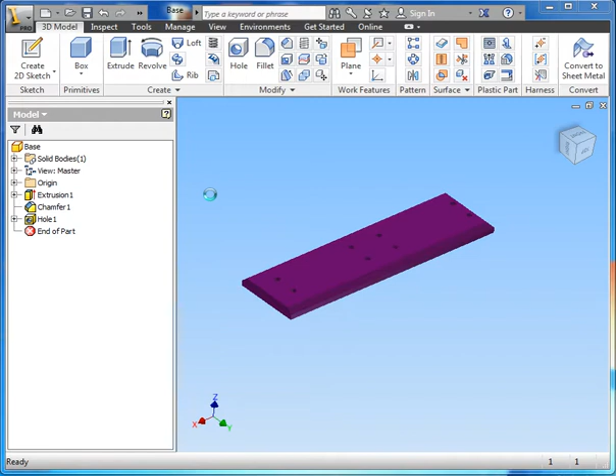What we're going to do now is make the anvil holder and the piston holder. Let's go ahead and make a new part. Standard inch IPT. Create. So now we're in the new part field.

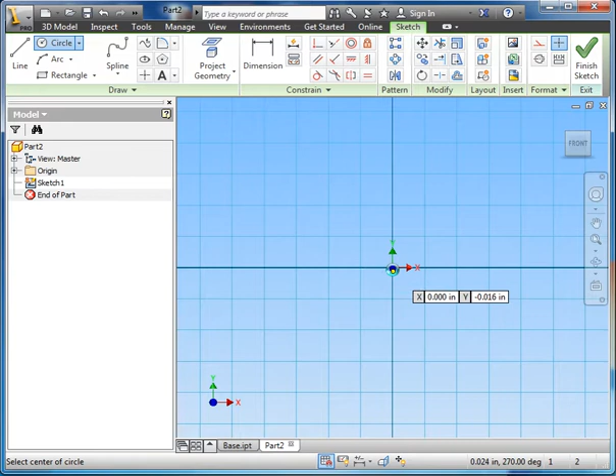I'm going to make a sketch, and we'll sketch on the plane here. Now, these two holders are going to be holding round objects, so I'm just going to center everything on the plane, because that way later on we could use the planes for constraining. Let's start here, green dot, I'm going to make a 1-inch circle.

So dynamic input, I type 1, enter, there's my 1-inch circle. Now I'm going to make a 2-inch circle, this is going to be the outside. So I go 2, enter, like so.

So I've got my circle there. I'll use my rectangle tool, click on that intersection and that intersection. Oops, try that again. There we go. So I've got it lining up there, lining up there. I could have used a 3-point for this, but didn't.

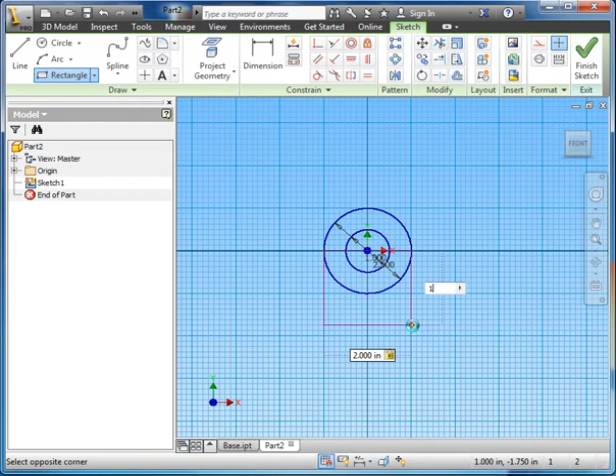And we'll make this 1.5 - sorry, that should be 2, tab 1.5. So we've got a basic little cube there. From here, we're going to use the trim tool. Trim that out. Hit escape to leave the command, and we'll click on this and delete that line.

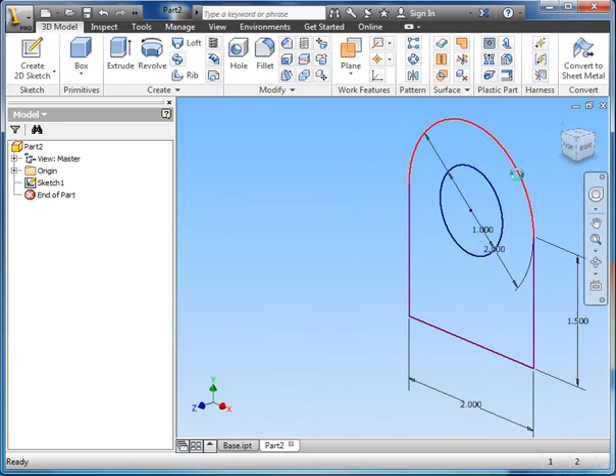So we're left with just this profile. Finish sketch, and now let's extrude it. So I click extrude, 1 inch is selected by default, that's fine. Now I could make it bigger or smaller, let's just leave that at 1. And there we go, there's the basic part for the anvil holder, the one at the end.

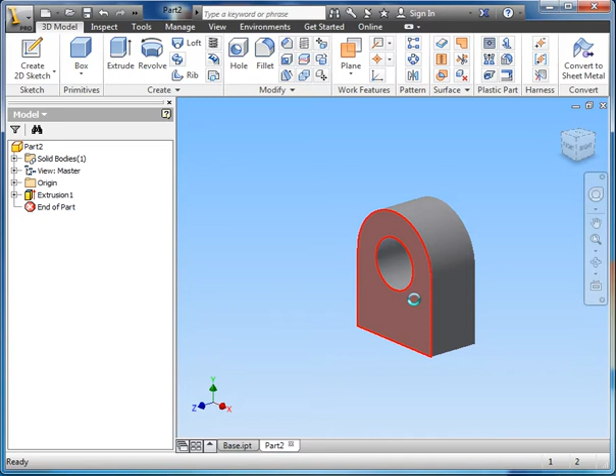Now, the anvil holder has 2 holes that match the 2 holes we drew on the base. So let's turn this around to the bottom, create a new sketch on there. There we go, and we want to use the point tool again. So I'm looking for my center point - you can see the green dot there is marking center. I'm going to move over, click, and click. Now let's add some dimensions to that.

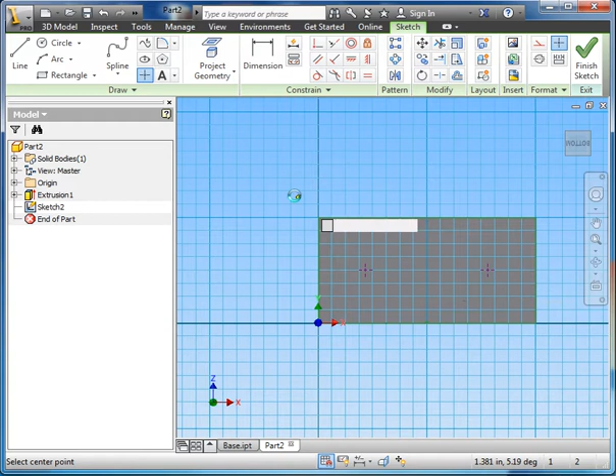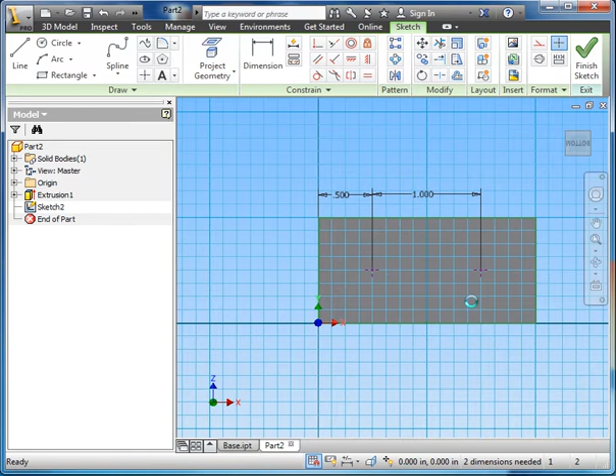Well, we know these are going to be 1 inch apart, and this has to be centered, so we'll go 0.5, and there's our centered holes. We know that it's centered this way because we used that point, but just to check we can click on there and see, okay, it's 0.5. Escape and finish sketch. So there's my 2 holes.

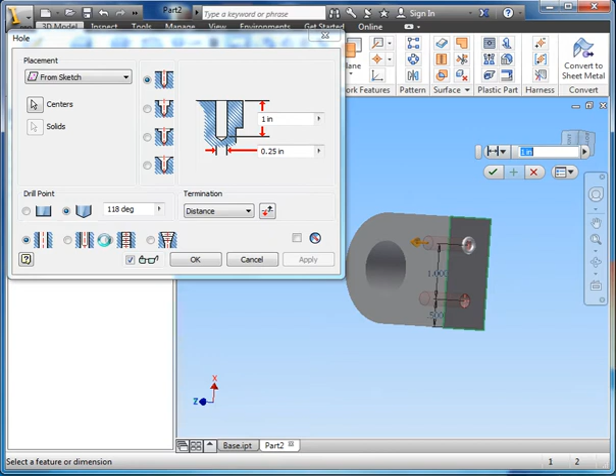Now I can take those 2 holes, I'm going to use my hole command again. You can see that it's selected them because it's the only holes available. And I'll turn my termination to distance, and we've got 1 inch depth there. And we're going to add a threaded hole, so over here we've got the thread, click on that, and it's going to come up to a whole other section here. You want to make sure you're using 1/4 inch, 1/4 20 UNC.

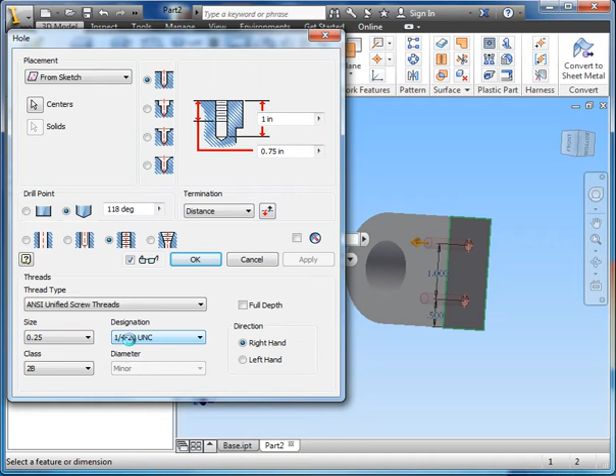What that means is the outside diameter of the thread is a 1/4 inch. I'm not quite sure what the inside diameter is, but the outside diameter, the high points on the thread, is 1/4 inch, and that there's going to be 20 threads per inch. This is a standard imperial thread. You could also have a 1/4 28 UNF, and those would be our 2 1/4 inches. But we're going to use a 1/4 20. I click OK, and you can see we've got the 2 holes threaded.

So from here, let's change the color again, because I like to do that. Orange, red, there we go. So we've got a nice red part. And let's save this - so this is the anvil holder.

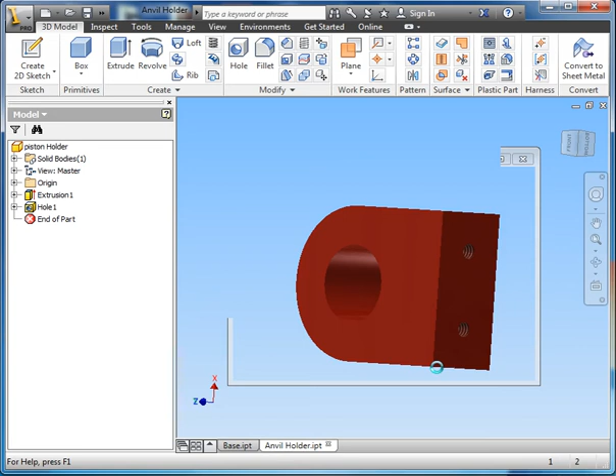There we go, save. Now let's go save again - we've done this in the past when we did the tire and the wheel project. Oops, right, let's go Save As. And now let's call this the piston holder. So piston holder, save. So now I've got 2 identical files named different things.

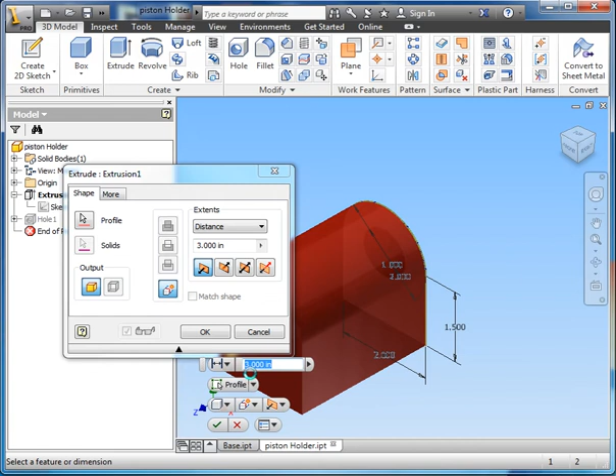But let's just go back and modify this. So I click the plus beside extrusion 1, right click, and we can go edit feature. Guess I didn't have to click the plus. And we want to make this 3 inches, so I can just drag it out - I could just type 3 in the box, but where's the fun in that? 3 inches, click the check mark. Now we're longer, like the piston holder.

Now we'll look at the bottom again. We've only got one set of holes, but the center of our base has two sets of holes. Click the plus here, right click, edit sketch, and we're going to add 2 more points.

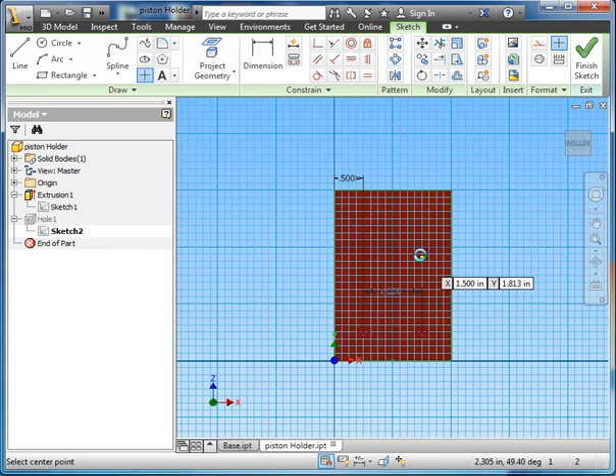Let's make sure they're one there. A little hard to see those points in this color. Let's change the color now - there we go. That's not right. Oh well, let's change the color inside the sketch.

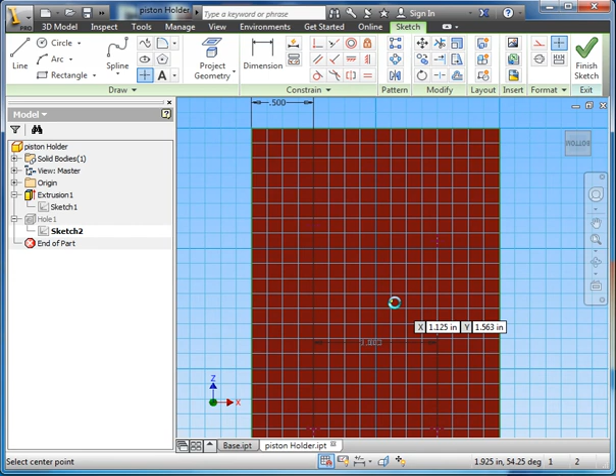Okay, that's fine. So let's add some general dimensions from here to there, we'll drag that out. So we've got 1.563, and this should just be 1.5.

Okay, we can add some constraints. So let's go horizontal between there and there, that's good. Horizontal between there and there - that brought that one down. And we can go vertical between there and there, that's good.

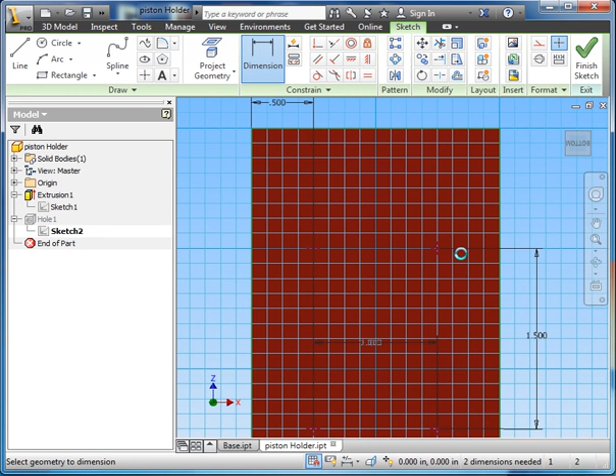And let's just add another dimension on here. Now, we know that this is 1.5 apart, and this whole part's 3, so in here we should probably go 0.75, and that'll center up those nicely. Finish sketch - now those moved, but we still don't have the other 2 holes.

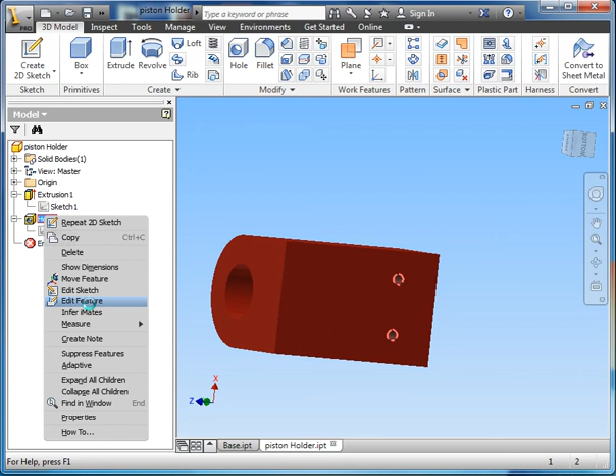So I'm going to right click on hole and go edit feature. Just move that to the side. And I'm going to select my other 2 holes and hit OK. And now all 4 of them are selected.

Now I can come up here and I can change my color, so we have a different color for the part. Let's go smooth orange, there we go. And we'll save this again because this is already saved as the piston holder. And there's those 2 parts.